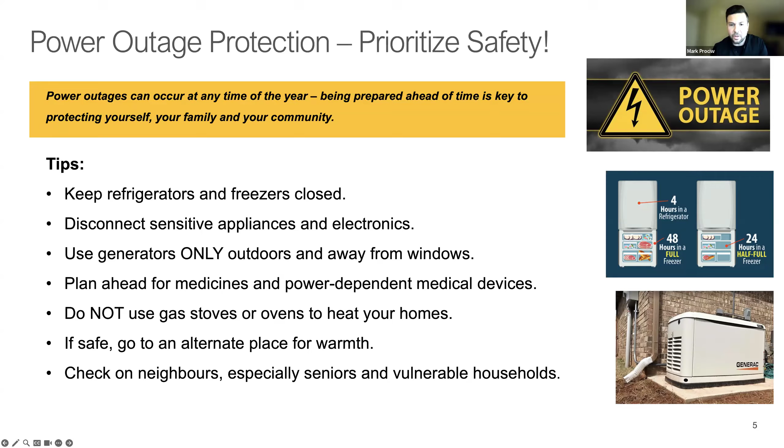And then one quick, brief little overview for those who don't know who we are. We are Enbridge Gas. We support over 4 million customers across Ontario within 317 different municipalities, and there's about 65,000 new attachments over the course of 2025 and 2026 that we were able to connect within the province. We also provide natural gas service in Quebec, Ohio, Utah, Wyoming, Idaho, and North Carolina. So 7.1 million customers across North America.

We deliver large-scale energy that keeps pace with the population growth across North America, and it is an affordable energy option. It provides the essential winter heat that millions of Ontarians depend on. And during periods of peak demand, our gas system carries more than 5 times the energy load of the electric grid, so this ensures people can stay within their homes while systems remain stable.

During heat waves, cold snaps, ice storms, some of which we experienced this past winter, natural gas consistently flows and ensures that we're able to meet demands as the overall system faces some stresses. So this protects our homes and it strengthens overall resiliency.

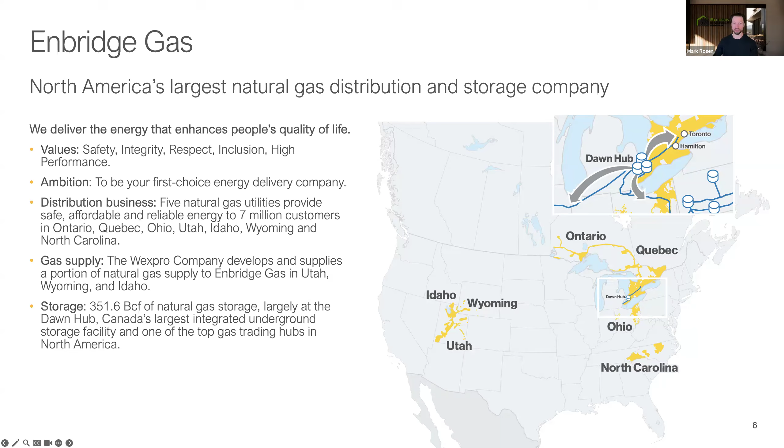So who are we presenting to you today? As I mentioned, my name is Mark Rosen. I've been working as an energy advisor for about 18 years at this point, which sort of surprises me when I say it out loud, but it has been a fantastic journey. I've been with Building Knowledge now for 3 years in the role of Director of Building Science, and I am a recovering architect in my past life and still hold that designation.

So my role in today's webinar, as someone who's been a part of the code development process as a member of committees and task groups, is to peel back the curtain a little bit on what these changes mean and give you a brief overview of them before we get into a discussion about what they are to builders in their application. So very happy to be hosting the webinar today.

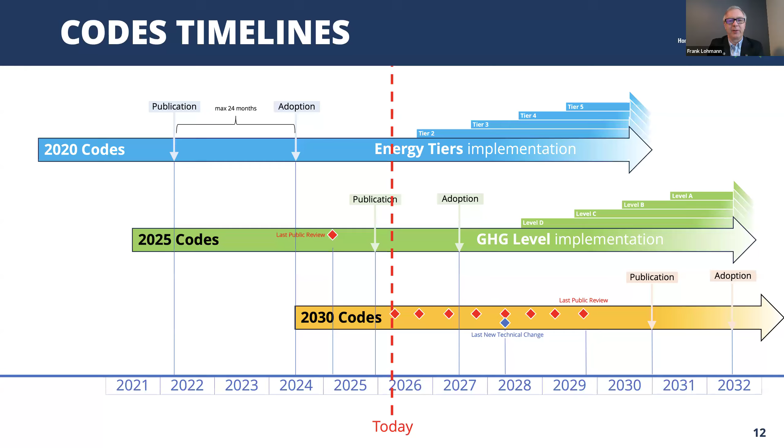It's a continuous code development—they're going to be continuously developed, and that's where we are today. So we are, as a code users community, watching the 2030 codes while we watch what happens with the 2025 codes. If you go to the next slide, I'm going to lead into some comments I'd like to make.

One thing you can see here—I presented this in February because I haven't updated my timeline to where we are today. What we're a bit concerned about is this cost overlap. We haven't even seen the cost being incurred for the 2020 codes moving up the tiers or steps to the highest level. I think BC's at step 3 or step 4, I'm not sure.

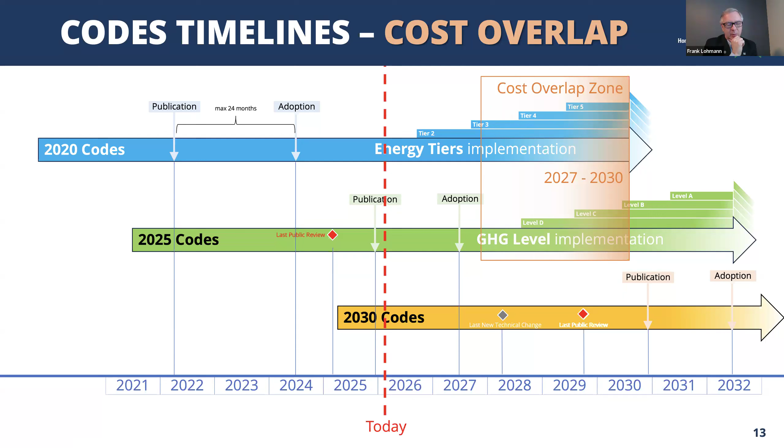So as those costs are still occurring between 2027 and 2030, the new 2025 national codes are being adopted, and all the changes and costs associated will overlap with the tiered costs. Just a note—maybe you can go to my next slide, because that is the perfect segue to some comments I'd like to make.

CHBA has done a back-of-the-envelope estimation of the cost for the 2025 codes in total on one archetype, overlaying the progressive cost of energy tiers, and we've come up to over $100,000 if you overlay them and apply today's labor and material cost per home. And that's a significant number. I'm happy to discuss that with anyone.

Cost estimates are always fun because everyone comes up with something different, but that's the number we come up with, and we think it's very significant, which is one reason why CHBA wrote the letter to the Prime Minister saying this cost is too much. But it's not the only part that we're worried about. There's a lot of systemic issues.

Mark mentioned earlier in his slide, there's going to be a lot of changes coming at a faster pace. More significant topics are coming than the ones we're discussing today. And at the same time, the code system on the national side has changed their governance.

They've changed the process. There's still no unified national interpretation system that could be used to make sure that we don't even interpret the code differently from city to city. And there's still no limit on any cost changes that any codes committee could ask for, and we feel the industry voice in all of this is being marginalized more and more. So those are the issues why we wrote. It's not just the cost. The cost may be the most visible.

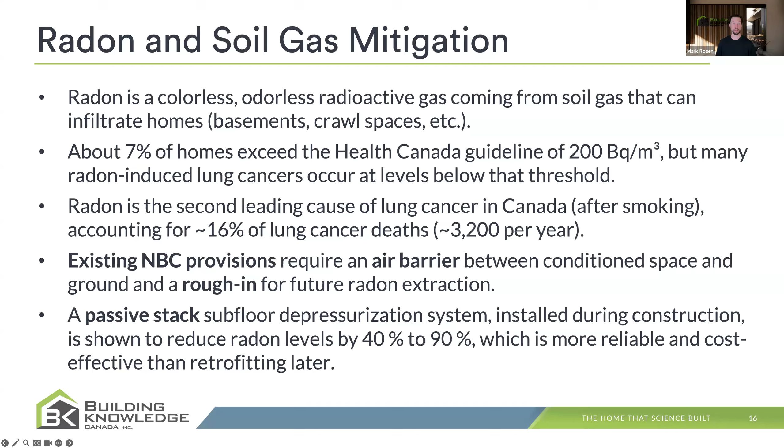But the research shown during the development of this new requirement acknowledged that a properly constructed passive stack can substantially perform and augment the reduction of radon levels, which was put forward as a more cost-effective and reliable method than retrofitting later. Now, we'll maybe have a little bit of debate on that.

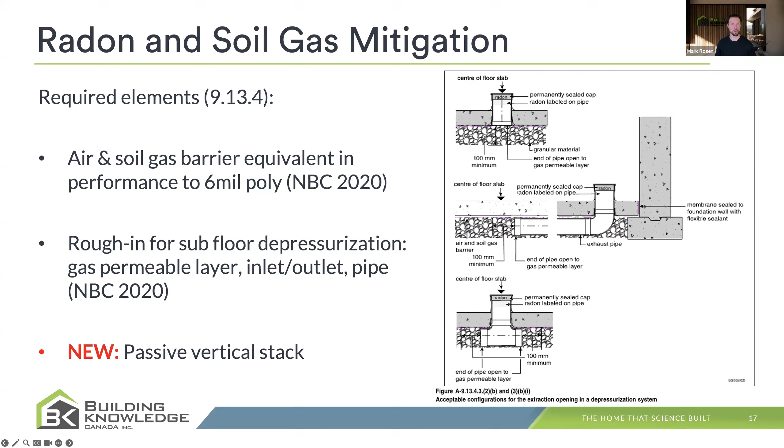There are some concerns that this is inflexible and maybe limited in its scope. Frank, I'll pass it to you to offer your perspective on this change and how you see that potentially limiting builders in their execution.

Yeah, thanks. I was just already opening my building code for some of the questions in the chat there. So I think as you mentioned, the sealing of overlapping joints in the soil gas—or air barriers, air to the ground, right—that's a very good change. On the walls we do it routinely with the acoustic sealant or the tape that sticks to the poly. If you use poly on the ground, you can use the same thing. I haven't confirmed that with any authorities, but that's typically how it's done. The polyethylene used to be in a standard where it said not for below ground applications, but that has been changed, so that problem has been taken care of.

So we think that's a positive change, but where we share the concern, Mark, is what you mentioned: passive stacks. The first bullet here is actually a non-technical concern. If you build a passive stack and it vents radon, it may give a false sense of security to a homeowner saying, oh, my inside radon concentration is acceptable as of new construction. That is not the case.

A passive stack doesn't have a fan. I can tell you a story of my own house. When I moved in and we measured the radon, we had levels of 6,000 becquerels per cubic meter. And you said the limit is 200, right? If I had a passive stack that would have reduced it by 90%, I would have still been way too high.

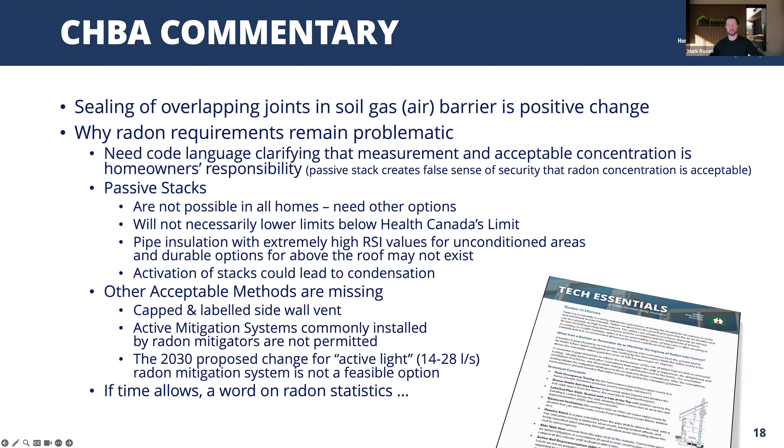Okay, moving on to our next proposed change, and this is combining 2 PCFs into one discussion. Both have to do with the protection of rough openings and the extension of the second plane of protection into those rough openings. So the PCFs we are referring to for this change are 1950 and 1951.

What these changes are trying to do is address an inconsistency with the way the code language spoke about the required sealing for rough openings, very much the same way it spoke about the requirements for sealing of penetrations. That was to treat them all as a face sealing problem.

For those familiar with the idea of a second plane of protection, we know that it is the part of the house that really needs to reject water back towards the exterior. It deals with all the water that gets past our cladding and past our window frames in the first place.

When we look at what happens at a rough opening where a window or door is installed, there's actually a very important step to extend that second plane of protection into the rough opening itself, so that any moisture that gets into that space can be redirected out. Sealing at the face alone doesn't do the job.

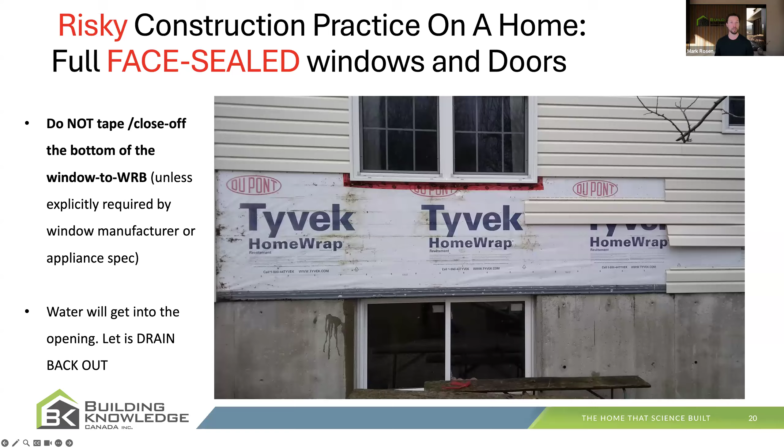In fact, this has led to misunderstandings about the intention of how we seal windows, where someone well-meaning, in this example, taped across all four sides of the window, sealing it to the weather barrier to make a barrier to water and air. But after only a short period of time, if you peel back that weather barrier, you see substantial damage and deterioration caused by water getting past that barrier without a pathway back out. It's being held in the wrong part of the assembly, causing problems where we really don't want them.

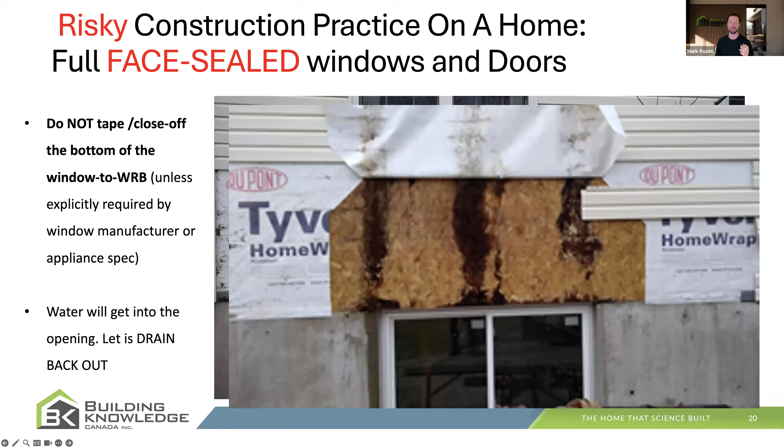So the concept here, which has been a best practice for a long time—and in wet locations like parts of BC has been executed for a long time—is this idea that water will get into these openings. How do we make sure it can come back out so we don't end up with problems like that? The two changes try to address related ideas around this concept.

The first one, protection of rough openings, still points to the CSA standard A440, which describes the protection of rough openings and the requirements around those. The change in NBC 2025 is that there are fewer exceptions to the language of that standard. The standard remains pointed to, but some exceptions that were being allowed in the code have been removed.

What's being asked of builders is that sill protection be installed at the rough openings of all windows and doors, and that while the interface of other assemblies with your weather barrier can be done at the face, at rough openings we need to turn that back into the depth of the assembly.

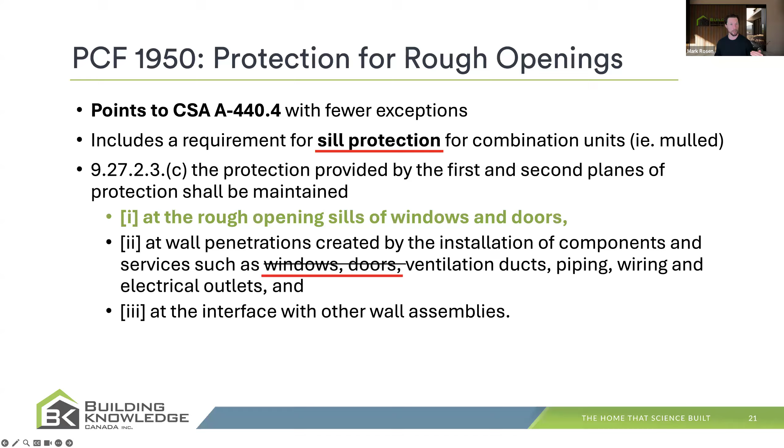This slide and the next show the actual language coming into the code. There's an extended appendix note for this change that explains the intent. Code language is very particular in that appendix notes, included for clarity, are not enforceable. So it's important when reading a code change to ask yourself: does the code language itself give me the clarity I need independent of the appendix note, even if the appendix note helps with initial understanding?

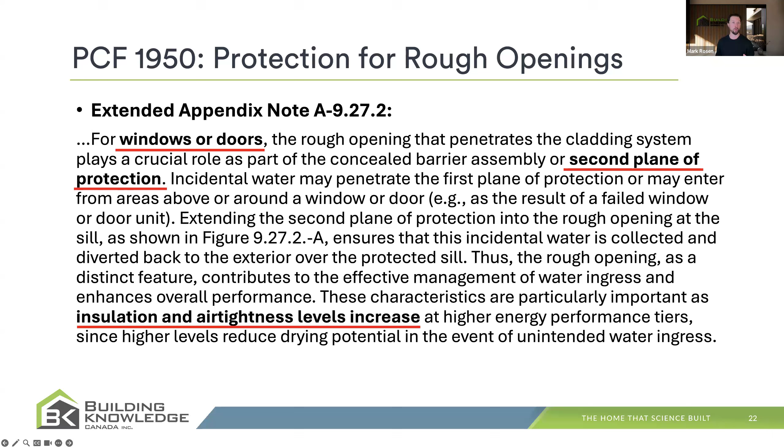Because a code official does not have to look at the appendix note when making an interpretation of the enforcement of the change. But what we're talking about here is something that I think has been quite well done in the appendix note—they've included very clear graphics to explain the requirement for extending this protection into rough openings.

Some of the best professionals in our industry, like Darrell Paul, worked closely with the CSA on that standard, including these changes in an illustrated way into the appendix note to give clarity. You can see in the diagrams that extension of the weather-resistant plane into the rough openings, with arrows directing the path for water back out, is the key component of this requirement for extension of sill protection in section 1950.

Now what has become a really hot topic for discussion is the change in 1951 around continuity of insulation, which introduces an exception allowing builders to install a lower level of insulation on the sill of a window than on the other three sides—possibly as little as no insulation at the sill—because they are prioritizing drainage over that thermal condition.

Now, there is some research out there that indicates if you do a proper job of air sealing the window at the interior plane, creating a dead air space underneath the sill does have insulating properties. You have to get it right for that to be true, but it's like trying to blow air into a pop bottle - because the air has nowhere to go, it's not possible. So as long as the air seal is continuous, you've substantially addressed the concerns here.

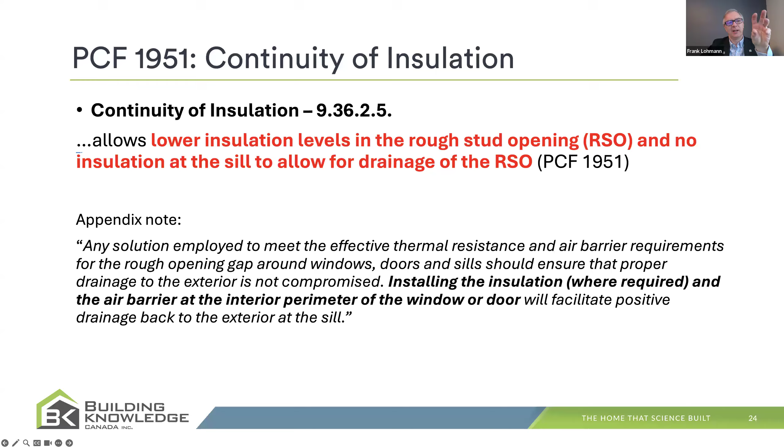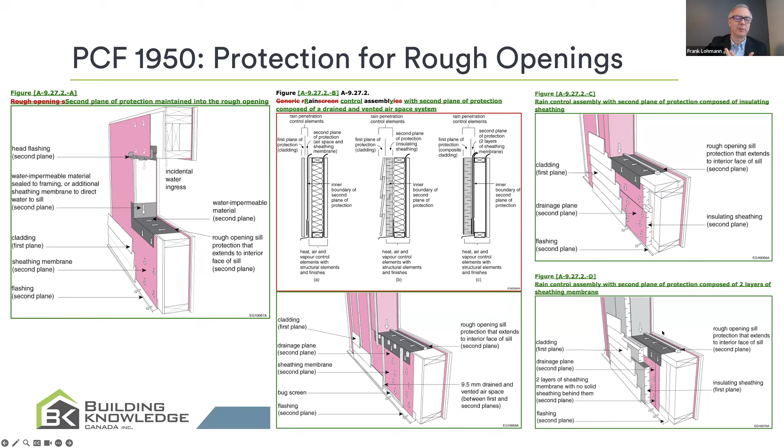On your slide, the picture in the middle was the one currently in the code. You see it's red around it, which in code language means it's being taken out. So that was the previous version, and what's around it is the new guidance. I think that's a major improvement, to just see here's what we're talking about. So it's good accepted practice - we have it in the CHBA manuals, you may know it from the LEEP training on windows.

What we're hearing on the moisture protection is there may be some trade sequencing and project scheduling issues, because the window installer won't do it since it's too late by the time they arrive, and the framers are often not equipped to do it. So if you have an air boss in your crew, maybe you need to expand the scope a little bit - they can also be the barrier boss, or a flashing boss, something like that. I don't know, but that's what we're hearing. So it just needs time to try it out, as you said, Mark. I think it's a great idea - get going, try this out, see where the challenges are, which tapes stick, which ones don't. There's lots of videos out there, including from Daryl Paul, lots of resources.

The insulation at the sill is a bit more problematic - I agree with you there too. We've heard during our public review comments, especially from the northern areas in BC, Alberta, and also in some cases in Ontario, that they have already seen condensation at the bottom of the frame, and that's why they do not leave it uninsulated. Mike, I think you can add to that.

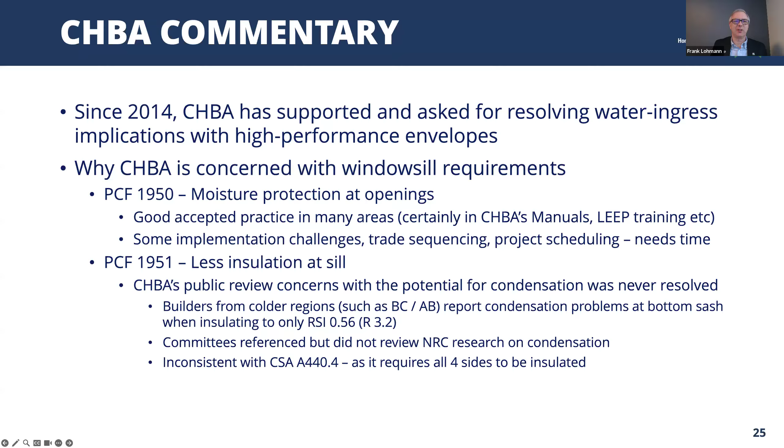One of our biggest pet peeves is we've asked the committee at the time before approval to review the research from its own researchers on condensation, and we don't think that happened to any level of due diligence. And lastly, you mentioned CSA 440.4 - there are few exceptions in the code, but we still think there is inconsistent and potentially conflicting language in CSA 440.4 and in the code, because CSA 440 still requires all four sides to be insulated. Maybe I'll pass it on to Mike, because I think you have more color commentary on that.

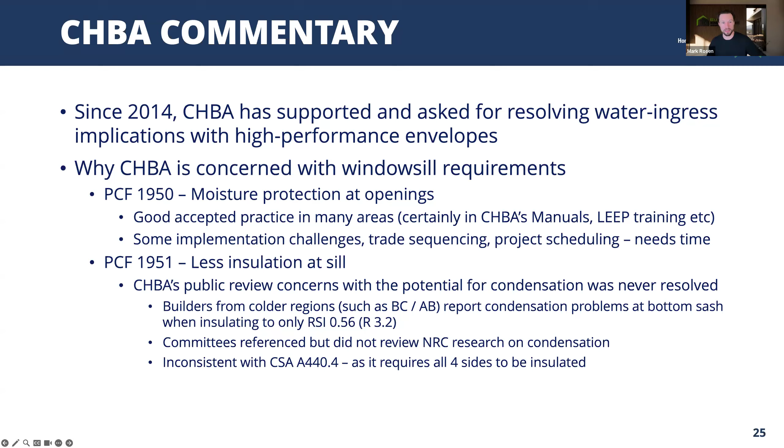Good comments. Yeah, Mike, definitely. Go ahead, Frank. Go ahead.

I just took a note of your question there, whether it only applies to multi-segment windows. I looked quickly in the code, and I can't find that it's limited to that. That may be something in an earlier proposed change form, but I will confirm that as well. I took note of it, so I don't know the answer. Thanks, Frank, it's really good commentary. The takeaway I have as well is that last change, the allowance for reduction of insulation at the sill, is not a requirement for reduction of insulation at the bottom of the sill.

So I think there's an opportunity for us collectively to re-examine our window details and see, as you said Mike, is what I'm doing now okay, or do I need to make a change? How does that affect sequencing? I think that's the message we take away with all of these things, right? We look at what we're doing, see where we stand. I'm going to keep us moving.

We've got 4 more changes to get through, so we'll stay on the topic of windows. An important change here with PCF 1823 introduces some really key and desirable improvements over the last version of the published code. So we'll get right into it.

The first tries to address the risk of introducing overheating into the house because we're trying to take most advantage of solar gains without necessarily recognizing their impact on comfort and the occupants. Energy modelers on the call will know that when you put higher solar gain glass into your energy model, your total energy goes down because you're getting free heat from the sun. But peak cooling demand goes up, air conditioning loads increase, and the risk for specific moments of occupant discomfort goes up.

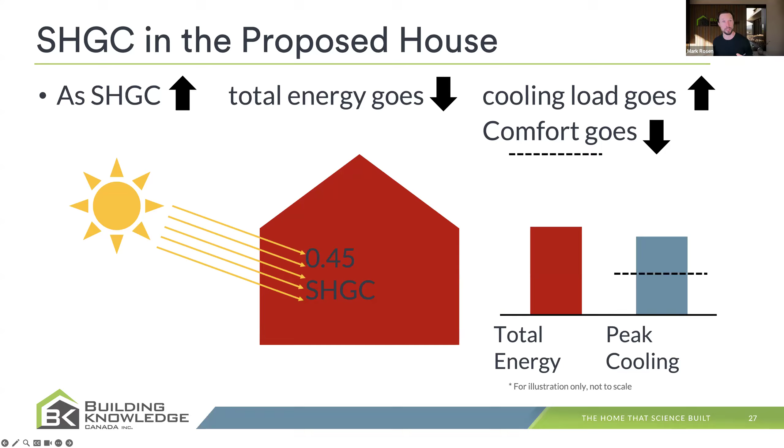Currently, the National Building Code 2020 tried to address this with a requirement on the performance path that your proposed house must have a peak cooling load lower than your reference house. This was very restrictive because the reference house used quite a low solar gain window. There's a semi-famous anecdote - I think it was Mark Bernhard out here in BC who analyzed Santa's house at the North Pole and found that it would fail this restrictive overheating limit.

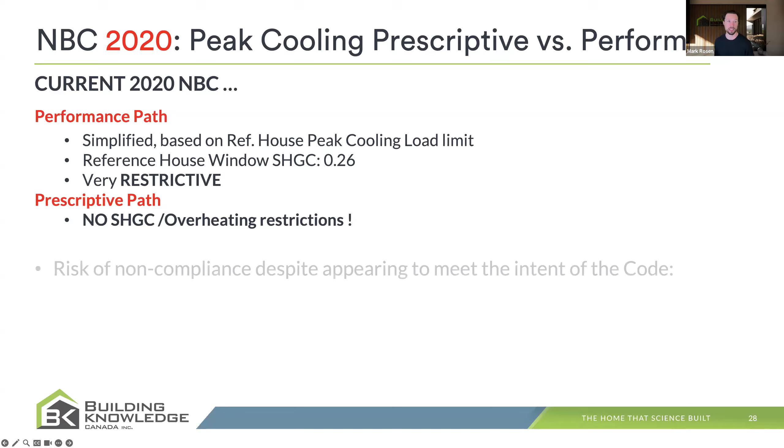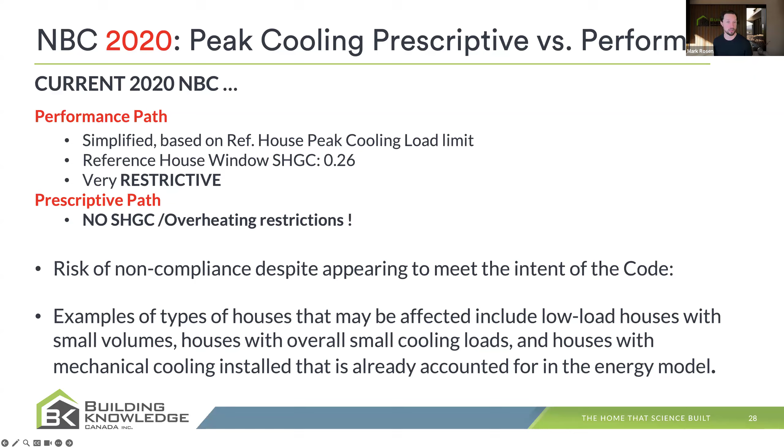So it was very problematic on the performance side because the measure trying to address this problem was too restrictive. On the prescriptive side, there was no limit to the solar heat gain coefficient you could use. In fact, because ER or energy rating in your window selection was an acceptable compliance pathway by itself, this sometimes pushed builders towards higher solar heat gain products, and following the prescriptive path could then lead to overheating problems. So there was a risk of projects being out of compliance despite intending to meet the code. There are some examples on the slide of homes facing these problems.

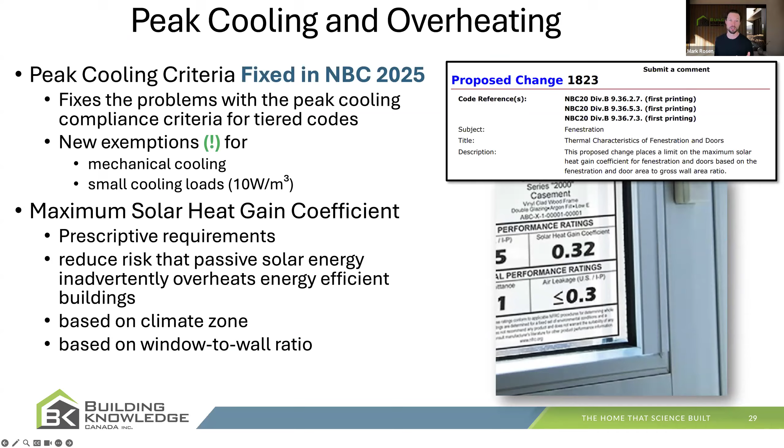Some really fantastic work was done in collaboration with the window industry and the committees working on this problem, to recognize that in the prescriptive path, where we're just choosing from a checklist of measures, there needs to be something to address the risk of overheating. That was introduced as an upper limit to the solar heat gain coefficient we use in our windows, based on two factors: the fenestration and door to wall ratio, the FDWR of the whole building, and this was an important change. If you're familiar with some of my presentations from a year and a half, 2 years ago, it was initially proposed this would be by orientation, but it was recognized that the complexity compared to the benefit in the prescriptive pathway was not useful.

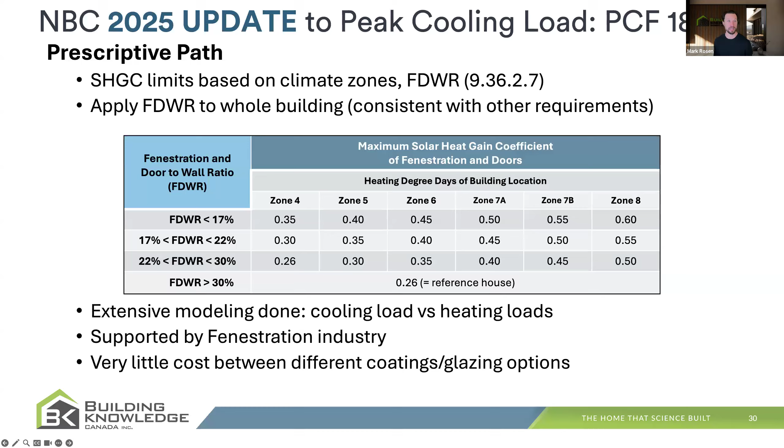So we are going with a whole house fenestration door to wall ratio, which is very familiar because we see these numbers - for those in Ontario, these align with the thresholds that move you into different compliance requirements. Then the climate zones are the other factor. As you go into colder climate zones, higher gain windows are permitted because the scale starts to shift from problematic to beneficial, taking advantage of free solar gain. This table is in the 2025 code and gives you, on the prescriptive side, your requirements for complying with the new solar heat gain limit, which I think is a plus.

It's a very good move. On the performance side, some really great work was done to look at that restrictive requirement and extend further options - this is in the theme of flexibility of options. The same requirement remains: if your proposed house is lower than the reference house in peak cooling load, you are still deemed to be in compliance. But there's a second method introduced that uses a design cooling intensity related to the new energy use intensity metrics pathway, which we'll get to next.

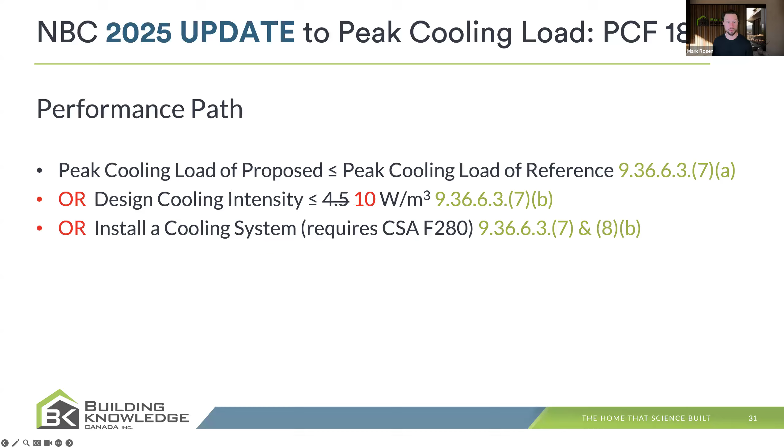This one I think is really where the success was, taking some cues from the CHBA's net zero program. If there is a mechanical cooling system installed that has been sized using the CSA F280 standard, then that is deemed to be compliant in the performance path as well, which gives builders a lot of flexibility to use heat pumps, for example, to represent their impact on the energy side of the equation and to be in compliance with the overheating requirement as a result.

So we'll maybe take about 3 to 5 minutes to talk about this change before we move on to the next one. I'll hand it over to you, Frank, for your perspective.

Yeah, very quickly. I mean, you explained it all, and I agree. This was an excellent piece of work. CHBA had identified these issues even before the 2020 codes were published, but apparently they couldn't be done before. Just to name a few, air conditioning wasn't even recognized, but the peak cooling criterion was one of the 3 mandatory checks for tiered codes, right?

So on the slide at the bottom, what we did is with CHBA's net zero homes, we analyzed where would they have fallen on the peak cooling criterion, and we found a 50% compliance rate, which is also what Mark Bernhard found. It doesn't depend on climate zone. Even if you had a well-designed home, it would make it difficult on all these things. I think there were 7 points. We had a backgrounder. CHBA members can find it on our knowledge center still. And I think all those points have been addressed on the prescriptive and on the performance side.

So we're very happy about that. I would also note the strong collaboration with the fenestration industry that modeled all of this, the pluses and minuses, as you explained. If you have a higher solar heat gain coefficient, you gain more heat in the winter, but you lose it in the summer. And as we're moving to a cooling climate, and many Ontario areas were already in a cooling climate, that balance needed to be done, and they did it for a lot of climate zones. So that's what created that table. A really good piece of work.

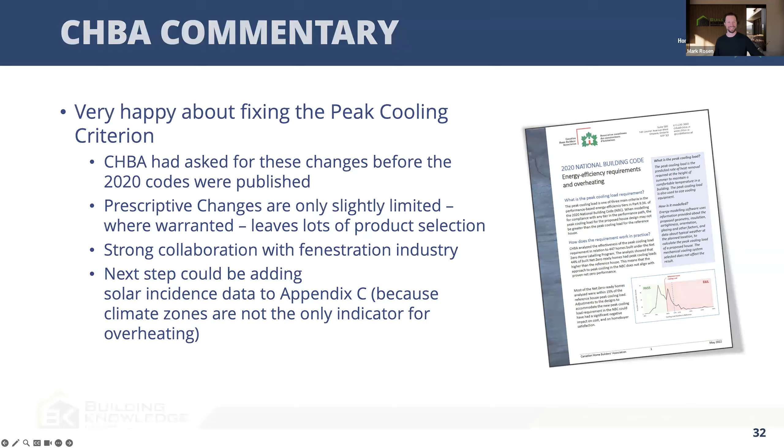So our next topic is there's too many PCFs to put on one slide here, but this is really acknowledging all the work that was done to improve and extend the prescriptive path points-based checklists that are part of compliance with the tiers. For those of you familiar with Energy Star, you'll already know how this works. The points system in the code gives you a list of measures, and depending on how far you go with any of those measures, you get points towards a total number of prescriptive points that you must accumulate to demonstrate compliance with the tier.

The first thing to be aware of is that they finally published targets for all 5 tiers in the prescriptive pathway. This was missing in the 2020 code because the work had not been completed to generate enough points to get beyond tier 2. Now we have that, so the point totals required for each tier are shown on this slide.

It's important to note that the Tier 4 and Tier 5 prescriptive pathways now have a minimum air tightness level associated with compliance. We haven't seen anyone harmonize at that level yet, so we don't know what that looks like in practice, although BC does have mandatory blower door testing as part of their STEP code, so there's a little bit of learning to look at there.

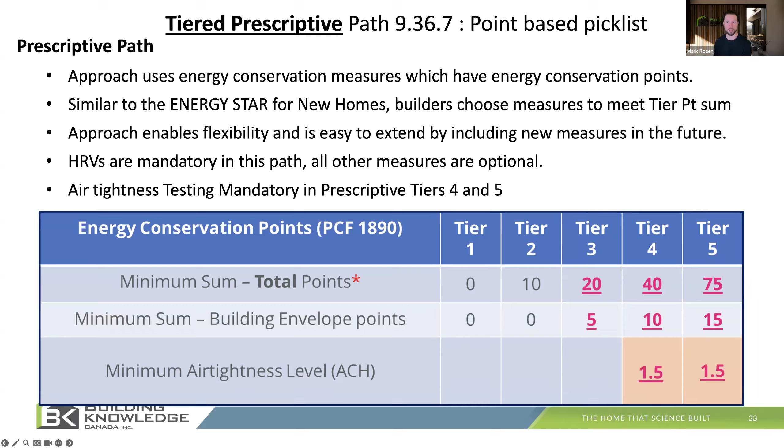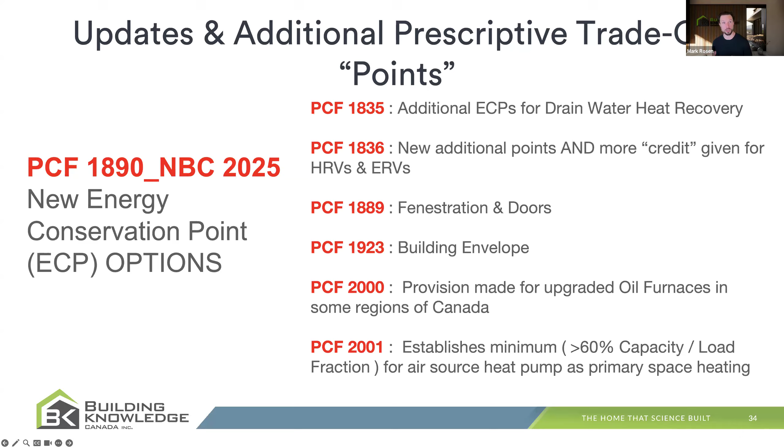Additional points for fenestration and door selection, building envelope measures, some provisions for certain areas of Canada related to upgraded oil furnaces, and air source heat pumps and other ways of calculating the percentage of the load that they serve are addressed in the prescriptive pathway as well, giving us many more areas to accumulate points, sometimes for things that we were already doing that the code just hadn't recognized yet and hadn't given points to.

A couple of the other things that are coming - this was an error. The air tightness tables in the 2020 code were reversed; the guarded testing table was where the unguarded testing table should have been, and vice versa. That has been corrected, and the points have been updated as a result.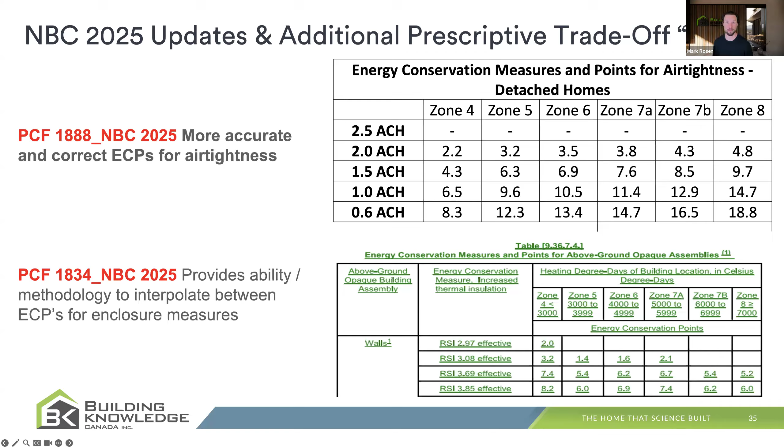In many of the categories, they've also introduced the ability to interpolate between published points on the table. So with walls, for example, here's a little example: if the wall that you're planning to build falls between two of the thresholds in the published points table - in this case, our wall is 3.39 RSI - you see that falls between 3.08 and 3.69.

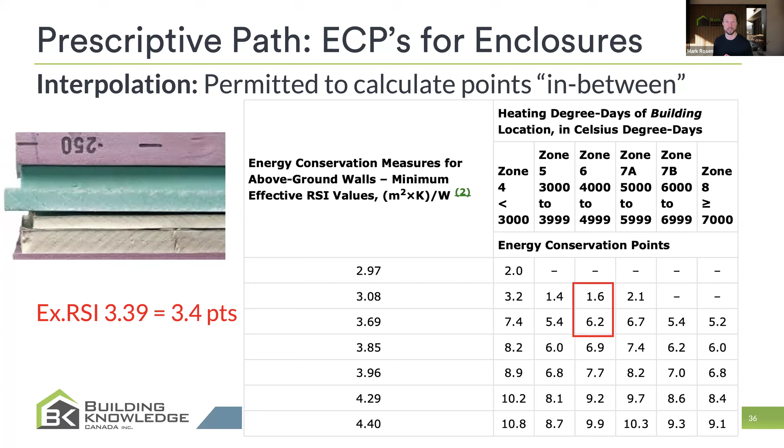We can actually use the interpolation formula now to get points from halfway between. You're no longer limited to getting the lower number of points - you can split the difference, and that's going to give us a little bit more flexibility and full credit for the measures we are taking, and be a little less sensitive to things like a cladding change that would bump you down out of a prescribed level. So this is another good news story - the proliferation of points gives us more flexibility and makes this prescriptive path more usable as we target higher tiers.

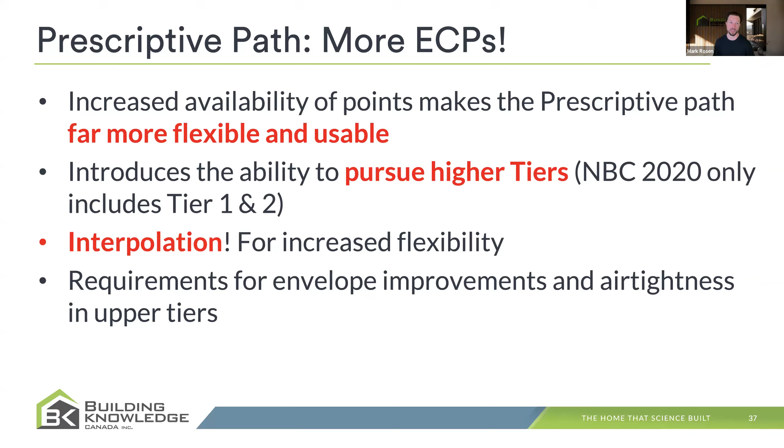I think the interpolation was a really great thing to see come through. And knowing that the upper tiers are protecting these highly insulated assemblies with an air tightness testing requirement - although that is another cost that comes with those upper tiers - I think it's an important building science consideration for protection of assemblies that many people are in favor of.

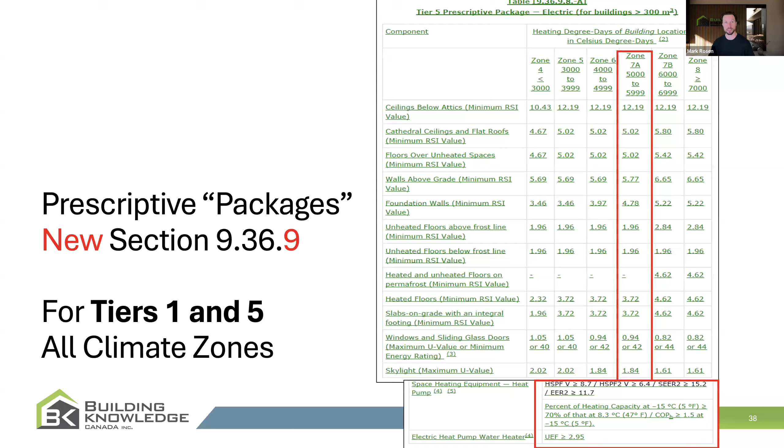There are also now prescriptive packages published for Tier 5 and Tier 1, and work is ongoing for the intermediate tiers. This is more aligned with what those in Ontario will recognize from SB 12, as a prescriptive group of measures that you can apply together to be deemed in compliance. They started with Tier 5 in part because there was a lack of points to go with the other pathway, but work on these is ongoing in the current code. I won't go into depth on these, but in the slides you'll receive afterwards, we do have an example of what a Tier 5 prescriptive home might look like.

And so I'll let you dive into that in more detail. But I think there's some good news here as well, Frank. Yeah, certainly agree with you in this assessment.

Great. And in Mike's words earlier, to have completed the 2020 code - we would have loved, and they actually weren't very far, to add at least a Tier 3 or Tier 4 at the time they published the 2020 code in 2022, which would have been really good. But anyway, it's a positive change. It gives options. I think even some provinces like BC, Quebec, and Ontario may have potentially adopted the tiered codes.

if this had been complete, because there was no complete prescriptive method. And Ontario, I remember, was very interested at the time. I'm not going to put words in their mouth, but anyway, this could have been done better if we had code development in mind as a wholesome approach - take one solution, finish it, and then put it out, rather than in bits and pieces over 2 or 3 code cycles.

So it's an excellent method. I agree with you, Mark, for builders to understand what is in play, and even for the builders in Ontario or in BC with step codes, or in Ontario with builder option packages under SB 12 - see where you end up. Try out a Tier 3, because that would maybe be the next step forward for many Ontario builders. How much is actually involved? And especially if you're a prescriptive builder and you don't have worked with an EA yet, this is an excellent way.

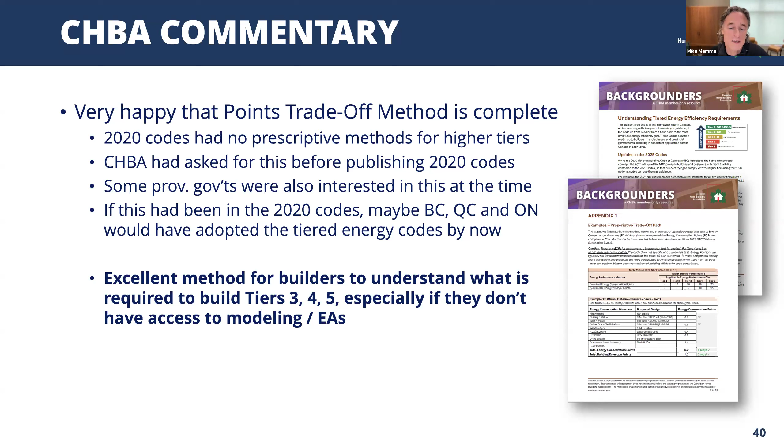The other thing about blower door tests is they help you meet these energy efficiency requirements so that you can meet certain levels of the code. But I think the biggest thing is, when your houses are tight, you've got a lot less risk and a lot less potential for major issues with the homes you're building.

Okay, into our last three changes that were presented today. Each of these is probably big enough to be a webinar of its own, so we'll do our best to move quickly through them. Thanks for your commentary, both. I know we could probably add a half hour to this webinar. Maybe we'll stay a few extra minutes to address some questions, if you're both okay with that.

The first of these last three changes is that there is a new energy compliance option called energy use intensity metrics, associated with PCF 1869. As I mentioned, this is quite technical. There are some formulas to get into that we don't have time for today.

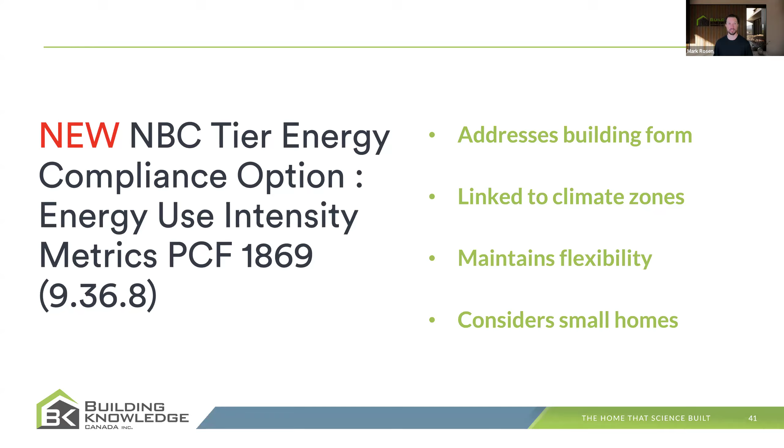What I want you to take away from today's webinar is that this change was introduced to address that certain housing forms are very challenged in demonstrating energy compliance when you use the reference house modeling approach, because the reference house makes some assumptions that mean homes with the right intent are sometimes challenged in compliance just by the nature of the comparison, the nature of the calculation.

What's interesting here is that both pathways remain. The EUI metrics compliance pathway does not replace or displace something that's in the code, it adds another compliance option to it. And while there is something to be said about the complexity of the compliance pathway options in front of us...

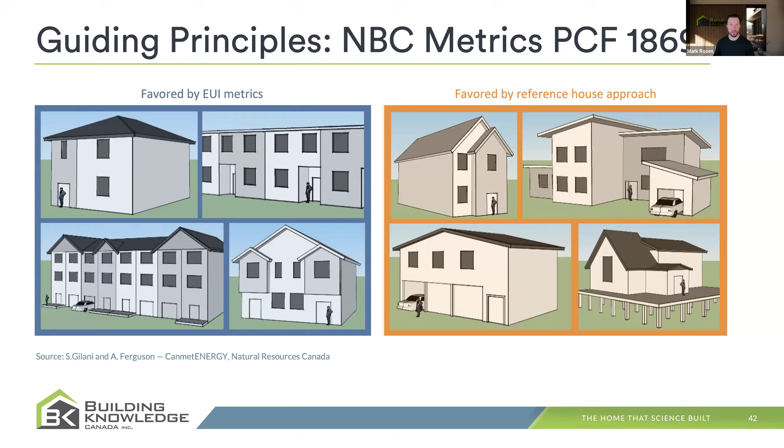In many ways, I think having an option that addresses these challenged housing forms directly is another good news story. It is a complex formula to understand out of the gates, so you will need to ask your energy advisor to look at this, understand it, and help you apply it. But overall, I think this is a positive story, and I'll give you guys the lightning round for comments on this one. Frank, go ahead.

Yeah, I totally agree with you. It's a great idea, and we don't have to dwell much on it. It's a great new method, predominantly fixing the issue with smaller, more compact geometries, which have been a problem in the reference and proposed approach. And we know that the smaller the units get, the more problematic it gets to model them in the performance path. So this is a really good approach.

Even in 2010, when I was still at NRC and we started developing 936, there were some people saying, can we not just have something simpler? So I'll put forward here my idea for the next code, which is actually a very old version of one of the first energy conservation codes in the world. But it is to decouple this method from the modeling data, because you still need, I guess, the input from a model to use this.

The version I'm talking about is a 1995 German energy conservation law, and there was a formula for each climate zone based on the area of the home, the volume of the home, the number of stories, and the climate zone. Based on those, you create a budget for each location based on the heating degree days there, not the climate zone. That is your budget. So you get a budget rather than having to run a model, and that creates a method truly between prescriptive, where you don't have to run a model—you just get a budget.

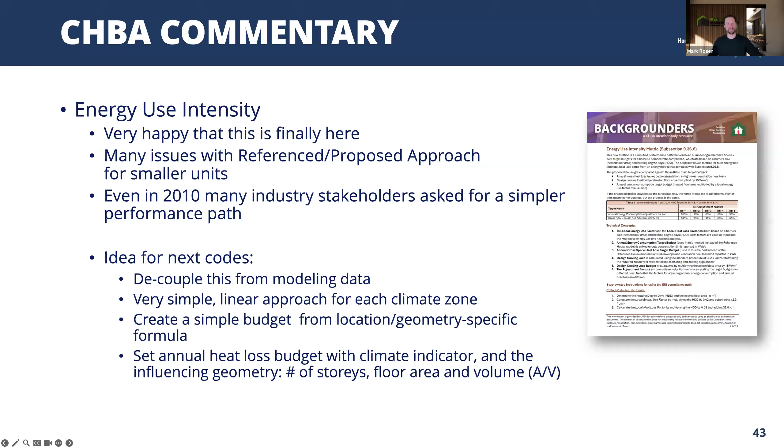There's some really great work here. I've got to acknowledge Alex Ferguson and Sarah Gilani for their good work on that PCF.

Okay, we're going to stretch—well, I'm going to stretch myself as an energy advisor here a little bit. We're going to try and tackle the lateral loads introduction in PCF 1475, which addresses seismic and wind resistance in homes. I think what we really need, and Frank, you'll speak to this a bit, is that this change isn't so much introducing brand new topics as making them less exempted than they used to be. So there's more requirement to apply existing measures broadly than there used to be.

This slide has a QR code to an illustrated guide produced by BC Housing, which you may find helpful. There's also a Canadian Wood Council tool to help you calculate lateral loads, and I believe CHBA has a tool as well, which Frank can speak to.

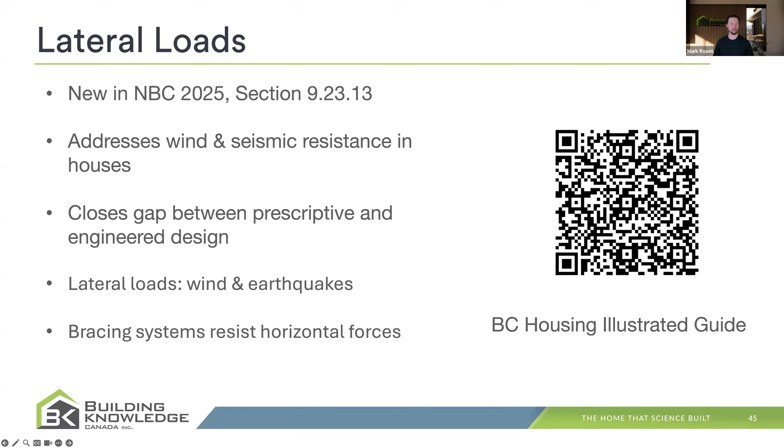The primary takeaway is that lateral loads address the seismic and wind-resistant characteristics of a building, with more emphasis on wind than we've had before, to resist not only racking strength but also uplift and overturning in homes. It deals with this through two new terms: braced wall bands, which are imaginary zones within which we must place a certain number and type of braced wall panels by story and by length, in order to resist those forces trying to take down our homes.

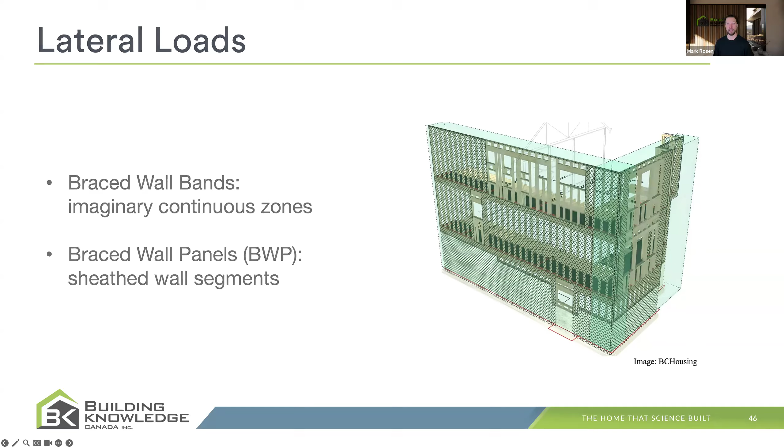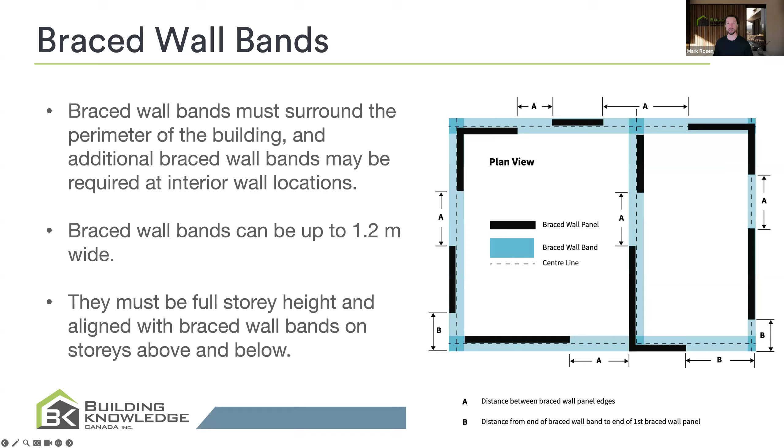In plan, you can see this shows the braced wall bands in blue. These are three-dimensional zones that carry up the full height of the building. Within those bands, with a certain amount of limited offset allowable, we have to place panels that act as shear panels, effectively resisting and tying our building down to the forces being applied to them.

Now, what does a braced wall panel look like? Many of these wall types will be very familiar—they can be wood-sheathed products with gypsum wallboard on the inside, and they can have a number of different combinations of exterior finish.

But what is more challenging for us to understand now is, as we move away from wood sheathing products and introduce exterior insulation applied directly to studs, those assemblies are now very challenged in complying with this pathway. You either need more wall area with the gypsum board serving that role, or you need to go back towards wood products as your exterior sheathing material.

So here's a sampling of wall types that can be treated as braced wall panels, but where you locate them and how you calculate them is really where the complexity of this change comes in.

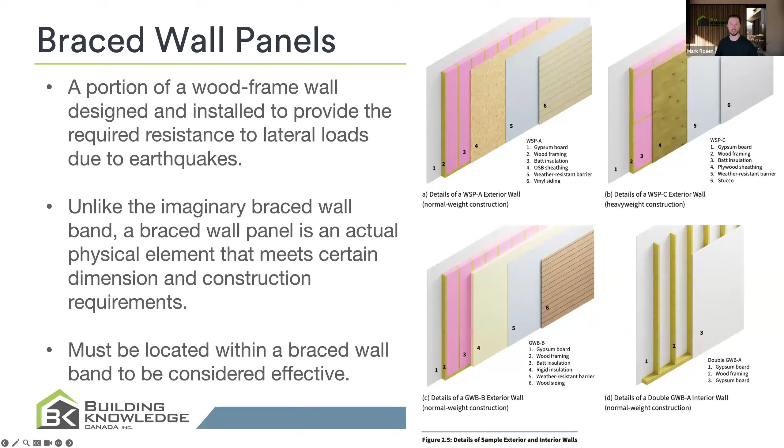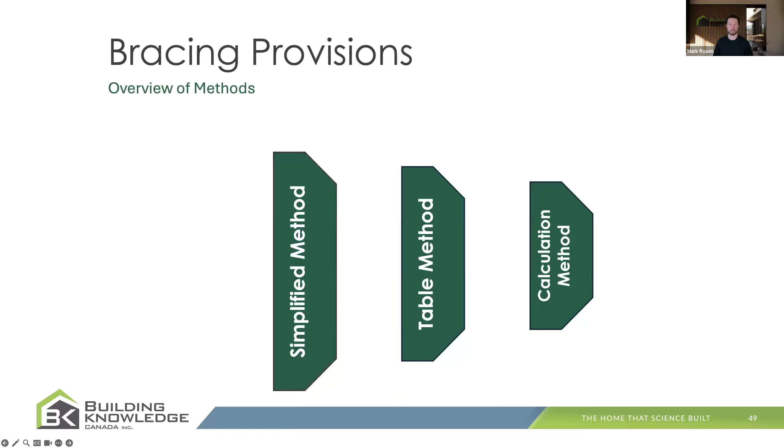Now, there are three compliance pathways in the lateral load section that range from simplified but very conservative—meaning they're probably overreaching and asking you for potentially more than necessary, but very cut and dry as to what complies and what does not—moving towards a table method and a calculation method that are more flexible but require more calculation, more inputs, and a deeper dive into the requirements of these new legislated items. So material cost and conservatism go up as you move towards a simpler compliance method.

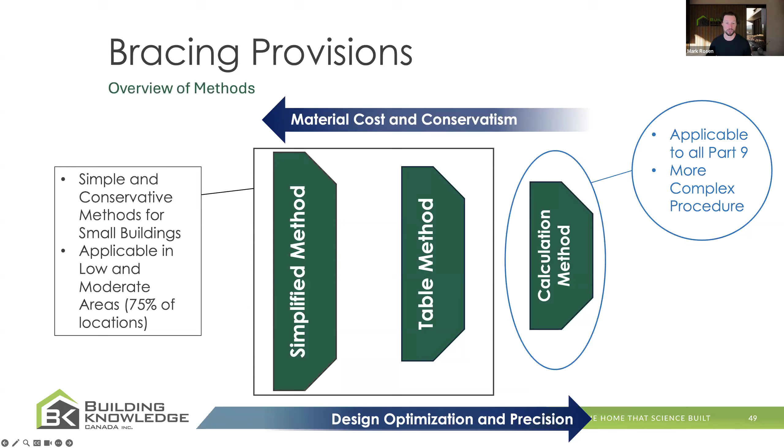You can optimize and go towards precision, but you have complexity as you go towards the right hand side of this. Now, I'll give you the energy advisor perspective here before I hand it over to Frank, just to say that this really appears at its surface to be a structural engineer's problem.

Why are we talking about this as energy advisors? We know that every builder across Canada works very closely with their structural engineers to analyze every single design. Probably not the case, there's going to be some questions asked about that. But because we're talking about assemblies here, as energy advisors, this has direct impact. The advice we're giving about what type of wall assemblies will help us comply with energy codes should at least account for these other requirements for wind and seismic protection. That might mean more rigid materials, more wood materials, perhaps different framing schedules, and how that impacts our effective thermal resistance calculations will matter. I think that's where the overlap lies.

But certainly this is one that has a lot of anxiety around it and complexity from the builder's perspective. So Frank and Michael, I'll get your take on it.

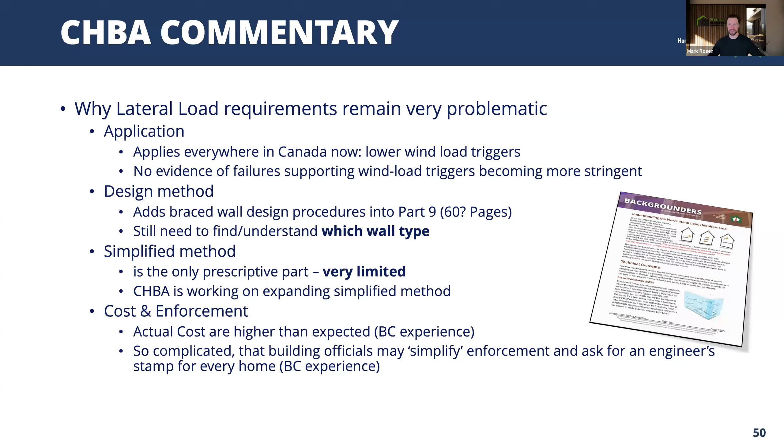So yeah, we've got lots of takeaways, as you can tell from this webinar, lots of areas for us to spend more time. This last topic is certainly one of those spaces, and this is brand new in the 2025 building code. We're going to try and end on this in an unbelievably short amount of time to cover a very complex topic, unfortunately. But for the first time in our National Building Code, the 2025 code introduces operational greenhouse gas emissions levels.

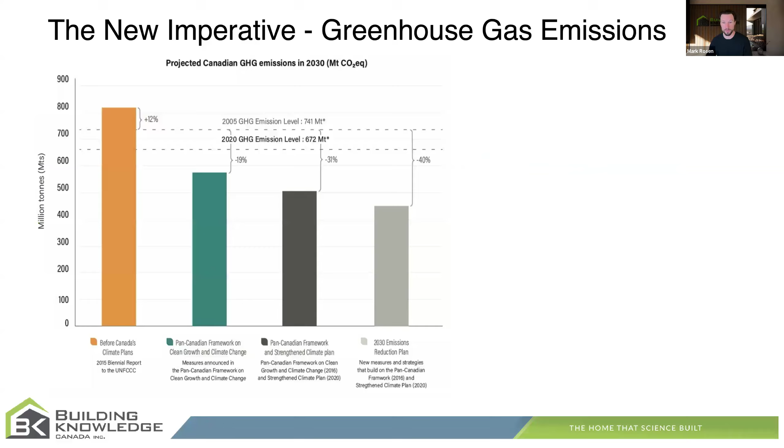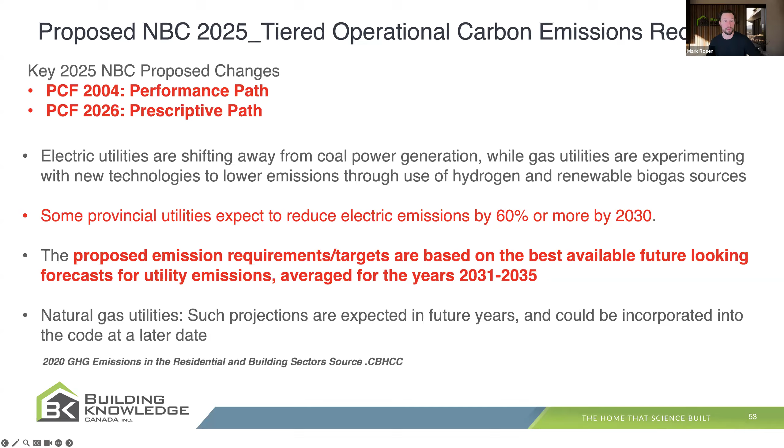And there are a few compliance options here. I'm going to jump ahead to a quick introduction of what PCFs affect this. The two key PCFs to review, if you're interested in learning more, are 2004, which describes the performance pathway for complying with these new levels, and 2026, which describes the prescriptive pathways for complying with these levels. It's important to know that one of the big comments received in the public review, and that is still true, is that neither compliance pathway acknowledges the contribution of renewables on site. So this is purely emissions from the home and from the electrical grids that the homes are connected to.

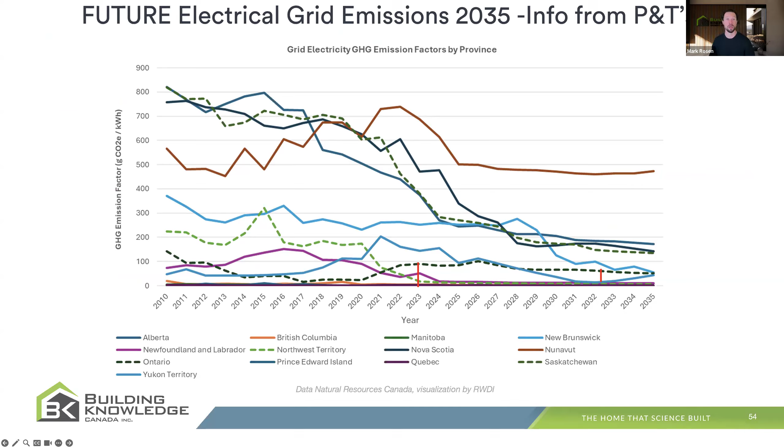Electrical grids across the country are trending to the good on average. Some provinces, like Ontario, in fact, are moving slightly in the other direction. But our historical message of there being really bad emitting provinces is changing. And in order to address that, the emissions factors, this is a new term for many of you that you'll have to get familiar with. The emissions factor refers to the greenhouse gas emissions created in the generation and transport of electricity through grids to the homes they are connected to.

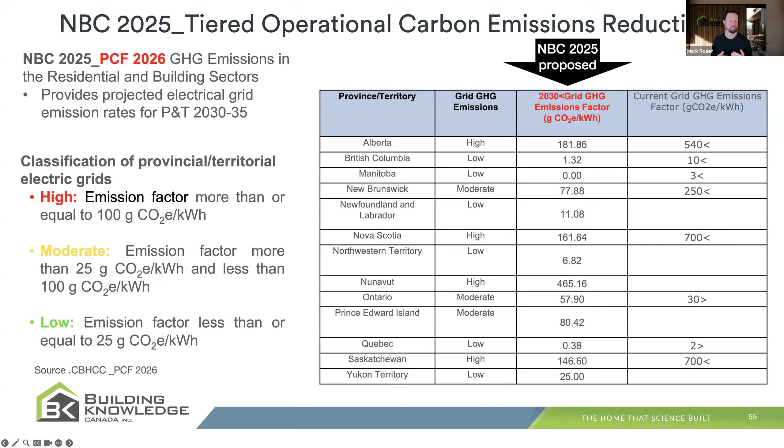And in accounting for the impact on greenhouse gas emissions of a home, we have to take that electricity load and multiply it by the emissions factor for our location. The published table of emissions factors in the 2025 code uses forward-looking projections for electricity and takes the average of what those grids are projected to emit between 2031 and 2035, based on the best available literature at the time of publication. This is changing all the time in reality, but in order to put a mark in the sand, this table has been published in 2025 as one of the pathways for determining emissions factors, and it's being reviewed and revised on a 5-year cycle with the current code's progression.

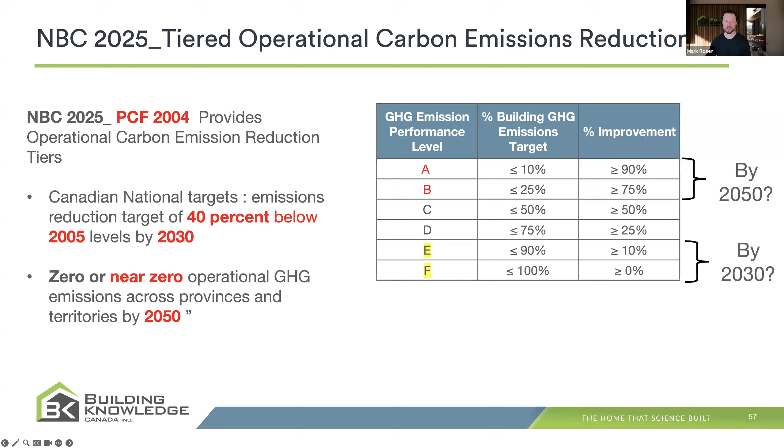So I'll let you dive into that in more detail with the deck when you have it afterwards. But at a very high level, our compliance is going to target one of these levels that are notionally part of our collective climate targets as a country: by 2030, a certain amount of reductions, by 2050, getting to zero or near zero levels of emissions from our homes. And the levels here, instead of being tiered 1, 2, 3, 4, 5, are levels like letter grades A, B, C, D, E, F. Again, as I mentioned, there are multiple compliance pathways for this.

The prescriptive pathway gives you a table, a method where you identify the energy source and appliance types you're using for space heating, the energy source and appliance types for hot water heating, and the emission factor bracket of your location to give you a guide to how many points of energy conservation you need to achieve to get to a performance level. This slide gives you level B performance with some examples of what that looks like.

And the performance side gives you a calculation: energy demand multiplied by X and hot water demand multiplied by Y, electricity demand, compared against the reference allowance, which uses a generic emissions factor for space heating and for hot water, and your location's emissions factor for electricity.

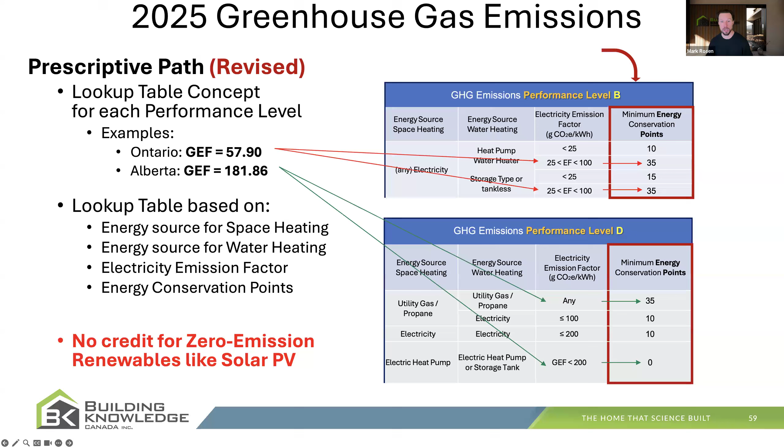Now, that's not enough information for you to go out and apply this methodology. For that, you'll have to watch this space for further webinars on how to do a deep dive into this. But suffice it to say that this is now available to the provinces and territories as they look at harmonization.

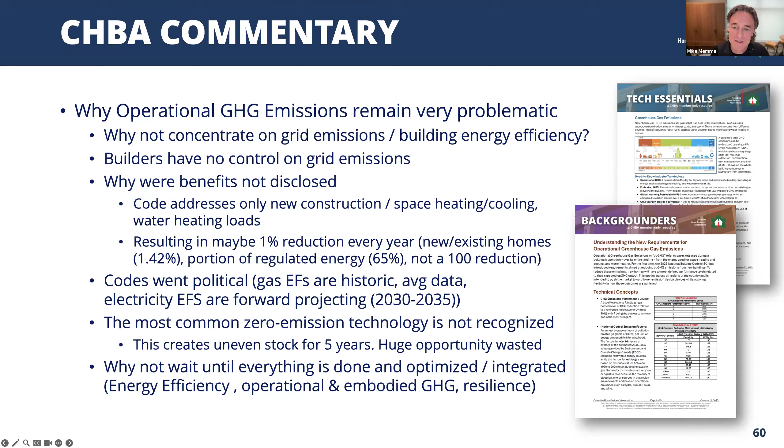They did it to themselves. It's unfortunate. I guess there's a final thing that I can say as a builder: if we had more site supers in the room during the code development process, we might actually be harmonizing, because we might have something that everybody could adopt and work with. This is just another challenge, and I hope with the Ontario line-by-line review of the code that isn't even up for consideration until they get it cleaned up and fixed up.

Well, thank you both. I think it's important to point out a couple of comments that came up in the chat. First, BC does have a zero carbon code that has been enforced now for a few years. So we're looking at BC to see what happens—is this causing confusion to have levels and steps both in place?

I wanted to highlight one comment from Murray Frank in the chat, which points out that compliance with many of these changes does not necessarily push us into engineers. In fact, the work of energy advisors staying up on this topic, or non-engineers in this space, can support Part 9 builders in complying without pushing them into engineering fees just blindly. We're going to capture all of the chat comments afterwards—thank you for everything you've put into there.

Mike, I think your last comment is a great segue to our main call to action when it comes to codes, which is please get involved. If you share the opinion of any of us on the call today, or have your own thoughts, the public review process of the national codes is your opportunity to provide feedback. Even beyond that, meetings are open to observers to come and participate and comment. It takes time, it's volunteer effort, but it's important. As Mike said, if more of the people implementing these things on the ground give feedback in real time—you saw in the first two slides Frank presented that it's a challenging short window in many situations where that influence really does matter.